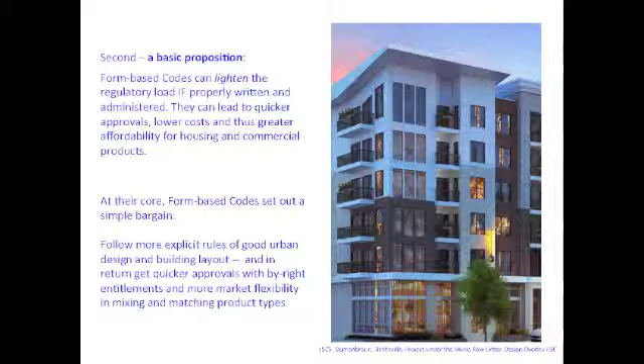If you follow the good urban design principles in the code, you get these rewards. The idea is to increase predictability and reduce risk, and to meet the expectations of the broader community for whom you're involved in being a part of making their future.

So a basic proposition follows from that, in italics to make sure it's clear: at its heart, the idea of form-based coding is not to add on layers of stuff, it's to reduce the load of regulatory bureaucracy that you have to deal with as a developer.

The other thing—'if' is in capitals, because like most things, you've got to do it right. If you go to the dentist, you expect the dentist to do it right, not mess up your teeth too much—it'll hurt. So if you're making a form-based code, you've got to do it right. We are going to talk a little about what doing it right means, and then about what happens when you do it wrong.

Again, repetition—I've been a teacher for nearly 40 years. If you've got a basic message, say it, and say it again, and say it again. So I'm saying it again.

If you follow more explicit rules of urban design, you get quicker approvals and by-right entitlements with market flexibility. That's if the process is done correctly by the municipality, with neighborhood buy-in, and with developers as the crucial agent of implementation. So, four questions.

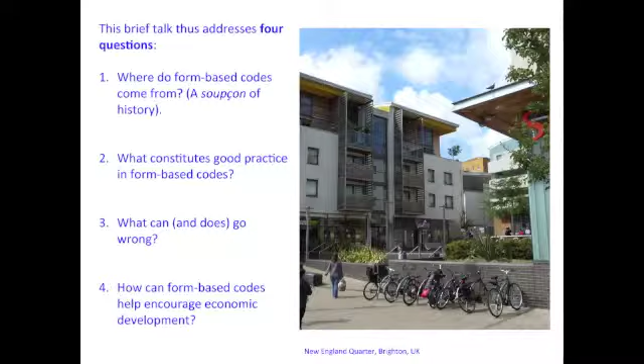A little soupçon of history, don't worry too much—there's about three slides about history and then it's over. But it's important you know where it comes from. What is good practice? What can and does go wrong? And very importantly, how can form-based codes encourage economic development?

Because they're a place-making device, and the presumption is that when you make great places that people want to be, that's one of the best economic development tools or mechanisms you could possibly have. If we want to, we can go all the way back to 2100 BC.

We're just going to note that—we're not going to go there, but we're going to note that form-based codes are not something thought up by architects and urban designers in the 1980s. You've all heard of somewhere called Seaside, by Andres Duany and Liz Plater-Zyberk. The little homeowners agreement code they had there is in many ways the origin of some aspects of form-based codes, but it's only the most recent of a series.

The Greeks had laws about how to make good streets. The Laws of the Indies governed the early Spanish settlements—when you read them, they have very clear ideas about what makes good civic space. And most usefully for what I'm going to say, the London Building Acts—not just because they're English, but I know about them because they're English.

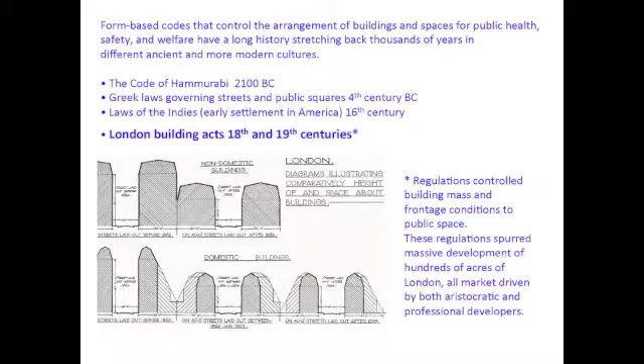But they have this basic equation: you control the building mass and what in our jargon we call frontage conditions. That's a useful term. It means how the building meets the street or meets the public realm. So when I lapse into jargon and say frontage conditions, I'm meaning how the building edge, your facade, meets the street or whatever the public space is.

And the London building regs controlled, you can see here some of the diagrams, in terms of building height, shadow cast, in terms of street widths. They focused on that.

They didn't concern themselves so much with use, but that amount of regulation, that predictability, drove hundreds of acres. Any of you know London, you may know Pimlico, Belgravia, Bayswater—virtually every bit of London that is fashionable now. Even the working class areas were product of these building codes because there were different classes of buildings. So that predictability basically set the pattern for the massive 19th century development of London by both aristocrats, dukes and earls, and also professional developers.

Here's an example by a fellow called Thomas Cubitt, who was a professional developer, begun in 1843. This is a part of London called Pimlico, which is near Victoria train station, if anybody knows that area. And it's a prime example of strict facade controls. These were built as townhomes, and the facades were very tightly controlled.

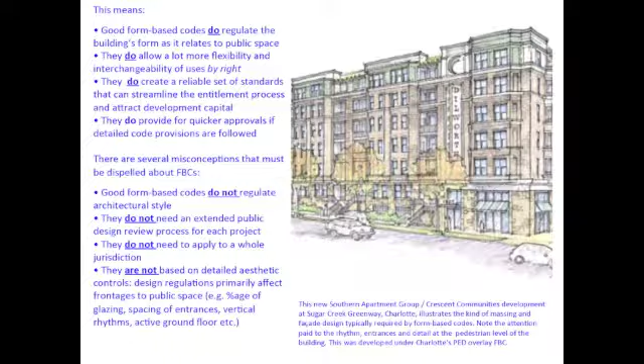So this means what codes are. They do regulate the building's form as it relates to public space. They do allow flexibility in uses by right. They do create a reliable set of standards. They do provide for quicker approvals if the code provisions are followed and if the code provisions are clearly written.

What they're not, and you will hear, despite everything I tell you, which will sound convincing while you're here, and then you go away and someone will say, well, don't believe that English guy, I mean the form-based code I had to work with, it did do this, and it did do that. I'm here to tell you it shouldn't have. Sorry, I can't fix it for you. But it shouldn't be doing any of these things. If it's a good form-based code, it should not be doing these.

Not regulating style. Not having an extended public design review process for every project, because that public process should be front-loaded into the development of the community plan and the code that goes with it. It doesn't need to apply to a whole jurisdiction. You'll see examples that work well at the small area plan level.

And it's not based on aesthetic controls. The only design regulation really is here. This is the building that's going up on the edge of my neighborhood in Dilworth, and what we're concerned about when I write form-based codes is really this bit, where the private realm meets the public realm.

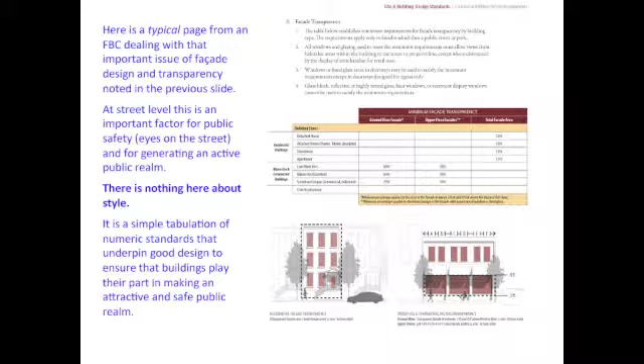Here's a typical page from a form-based code which deals precisely with that issue of what we refer to as transparency. It's the amount of glazing and how it's disposed in the building facade, so that these basic conditions of making a good pedestrian streetscape, making a safe pedestrian streetscape, and an interesting, visually interesting one, if you do all those things, it's active.

If it's active, people are there doing stuff, spending money, wanting to be there. So this is a tabulation of minimum window areas for either a residential or mixed-use commercial building that are requirements under the code. You can do more than these ratios, but you can't do less.

You cannot do less. But there's not a single word about style. This is a numeric tabulation that will guarantee a good standard of street-level urbanism.

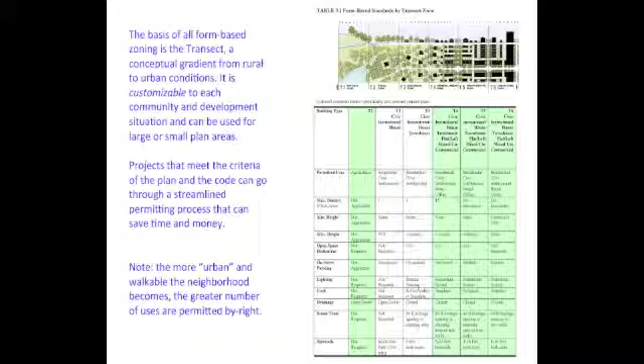You might hear a lot about this word, transect, which is a well-authenticated term from biology and geography. From geography most particularly, it's like a slice through a landscape, which geographers use to analyze. This is where Andres Duany and his wife Liz Plater-Zyberk really deserve their place in the history books, because they took that idea of a slice of urbanism, from the most rural to the most urban—this is a hypothetical slice—and used it not as a tool of analysis, but as a tool of synthesis, a tool of making places.

From the most natural zone, which is basically undisturbed, to rural, which is farms and other countryside activities, to suburban, generally low density and probably single use, and on to higher degrees of urbanism. This is a hypothetical example which is customizable. Many codes that I write only deal with these three, T4, T5, T6, the most urban end of the spectrum. And you'll see that the more urban you get, the more walkable, the more connected you get, the more uses that are allowed by right.

You wouldn't want that degree of use flexibility here in low-density suburbia. Doesn't make much sense—least of all out here in what is probably a nature preserve. But the more urban you get, by right, you get more flexibility of use.

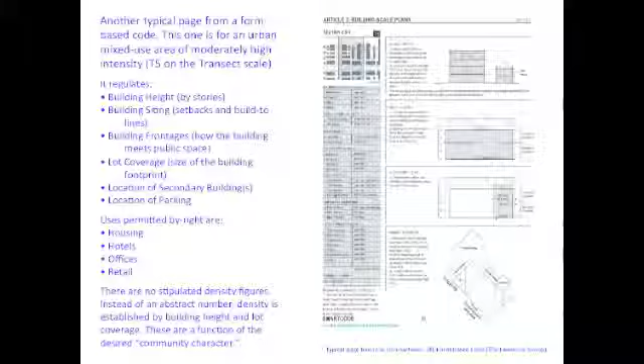It regulates these things: height, siting, frontage, coverage, location of secondary buildings, and location of parking. In this particular example, all these uses are permitted by right. There are no stipulated density figures—there's no DUA, there's no FAR. That's inherent in the working out of these things that are regulated.

Obviously, if you have a building that covers all or most of the lot, you're going to have a higher FAR probably than if your building is just on a little piece. But we're not interested in numbers. As someone said at a meeting earlier, you can't tell—if you're in a neighborhood meeting, you say the FAR is 4.

This was your example, I think, Peter. What does that mean? Doesn't really mean anything. But if you say this is zoned as community Main Street, everybody's got an image of what that is.

And if you say there's a height limit of 5 stories, which would be like Salisbury downtown, perhaps, or the Plaza building there, which is 12 stories. But by defining the community character, the numbers, it means you've got to think about your pro forma slightly differently, because you've got to arrive at the numbers through this mystical process called design, like you need people like me. You need to think a little bit about design, which is the whole point about form-based codes.

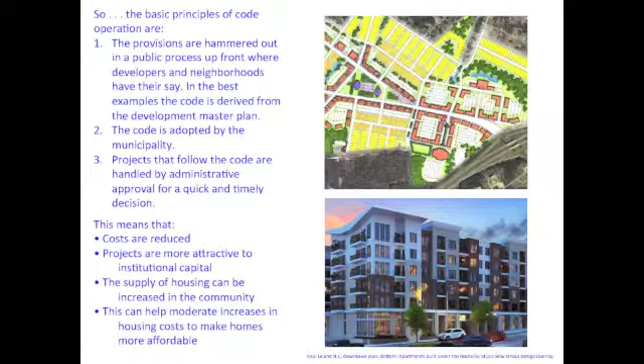So what this means, you've got 3 basic principles of operation. You hammer it out up front. The plan is adopted. The code is adopted as quickly after, ideally within 9 months of adopting the plan. And then if you follow the code, you get quick and timely approvals. Costs are reduced. You can see the bullet points for yourself, I will not read them out, but you can see them. And here is an example in Nashville, which is receiving a lot of attention because it's the product of this kind of zoning system.

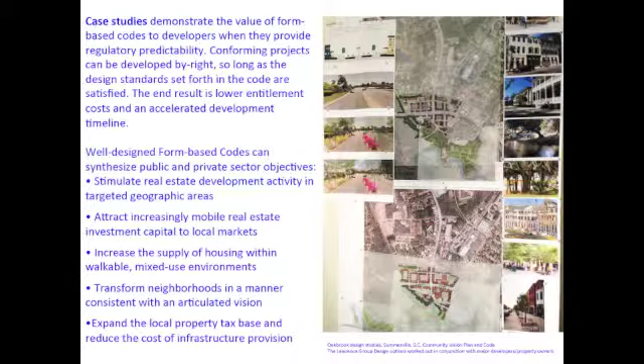So quickly, 2 case studies, and we'll wrap this piece up. This is an example, this actually is in Summerville, South Carolina. This is the kind of work we do as part of a small area plan, working with individual property owners. Here's me doing a low-density version for his land, which is this bit, and adjacent properties so that there could be a coherent vision and redefining the corridor.

This is a higher density vision, working with neighbors, working with property owners to really hammer out what that small area plan should be, and then developing a code.

Well-designed form-based codes, again, we've got 5 bullet points, I won't take time to read them out, but they're all good things we're interested in: economic development, housing affordability, attracting capital, which in the competitive world, we want capital to come to our neighborhood, to our project, not go to Nashville. But it does go to Nashville because they've sorted some things out very well.

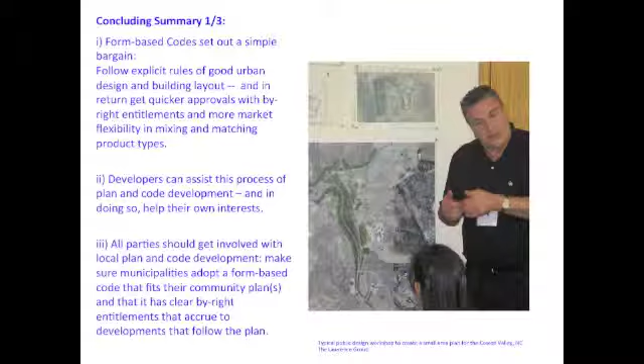So, you see, we're getting near the end. Summary, last 3 slides. There's the bargain. Good urban design, quicker approvals, by-right flexibility. Stay involved. Push that. Get informed. Don't react to form-based code about myths and just wrong-headed stuff. Understand what it is. Understand how it's a tool for you, and then press the other people involved to honor their part of the bargain. Form-based codes are a bargain. Do this, you get that.

Policymakers, public officials must ensure that the codes make it easy for the private sector to develop what the community says it wants. And the community's got to act like adults and not have a tantrum when it says, oh, I didn't realize, I wasn't paying attention. Well, you had your chance.

It's like not turning up for the exam. I'm not giving you a second chance. I'm not giving you a special exam. People need to be real and pay attention. This is important business.

We focus on the public realm. All the bruising combat between the competing interest groups takes place at the front end. And it's tough. It can be fun. It can be frightening. It can be scary.